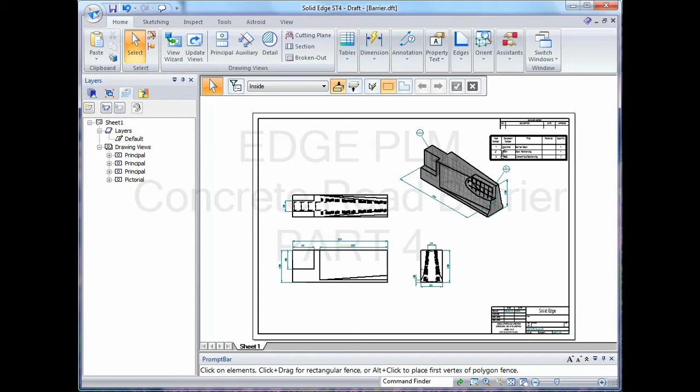Hi, I'm Tom Harris, and you've joined me to watch updating a drafted concrete road barrier.

So the first thing we do is we double click on the draft. It brings us straight into the assembly, and depending on how it's set up, in this case I've got it set up with a whole heap of variables. I'm just going to show all of them.

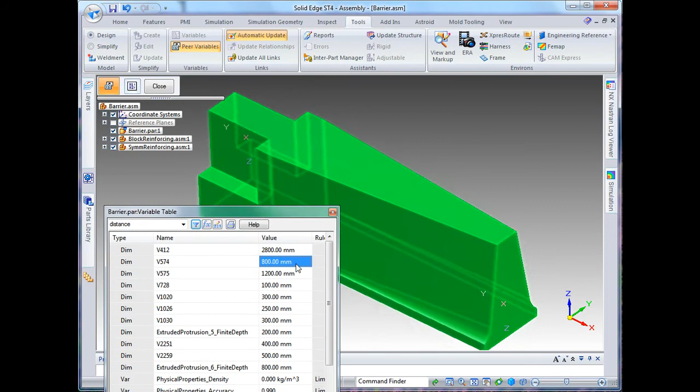Now I want to make some fairly major changes to this model, so I'm just going through updating my concrete block fairly substantially. I'll just make a number of different changes. You can see the model updating live in the background behind me.

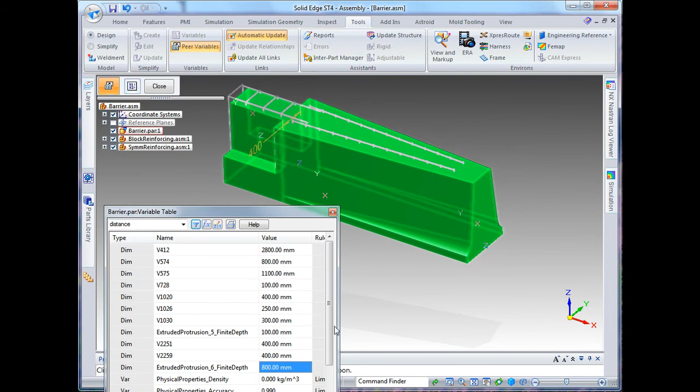If the changes have only updated the parts and not all of the assembly relationships, then you need to do a control update, which updates all. Now I'm on to the second part, or the second assembly, sub-assembly, which is the block reinforcing.

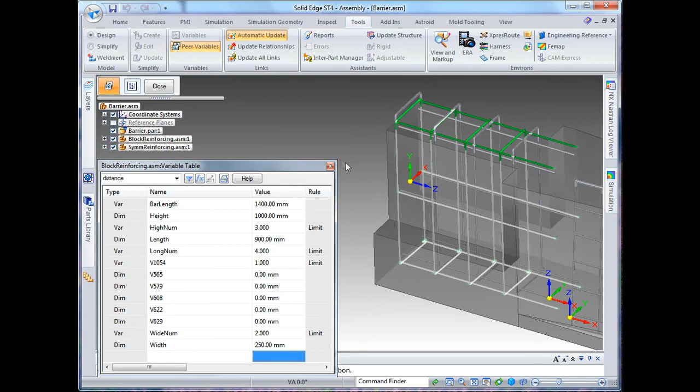I'm just going to make some reasonably major changes to the length, the spacing, the number of occurrences of the patterns. We'll make a few changes just so that you can see that when we update it all, every single dimensional change that affects a draft is recorded and tracked.

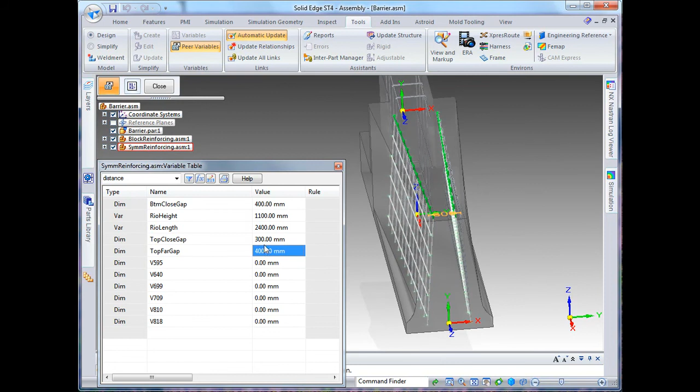So now I'm updating the positioning of the reinforcing, and also the size of the reinforcing. Okay, do a control update to check it. I think that's okay.

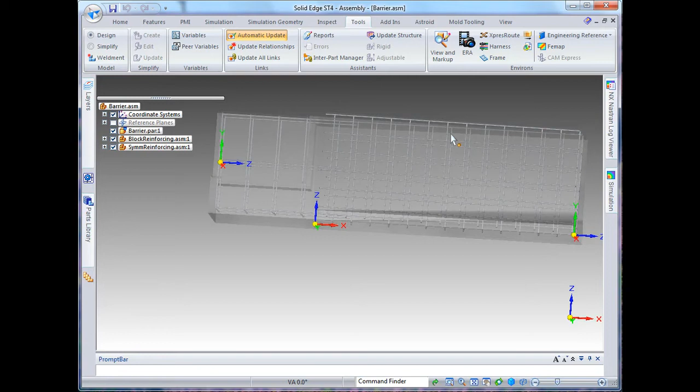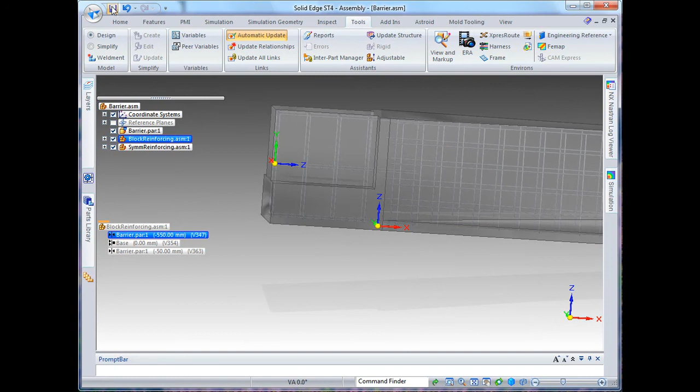And I just want to change the height, it's still a little bit too high. Okay. I've got to change the assembly relationships for the block just to bring that down as well. So now I save it and return to my draft file.

You'll notice there's thin grey boxes around. If I hover over them, it tells me what the problem is, and that is that the drawing views are out of date.

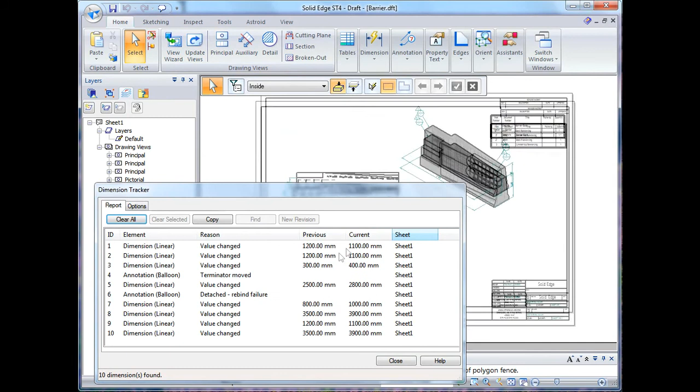So update those views, and I get this thing called a dimension tracker, and it gives me every single dimensional or annotation change in the drawing, including which sheet it's on, which is particularly useful for multi-sheet drawings. I can clear all of them, I can record them, and that's updated my model.